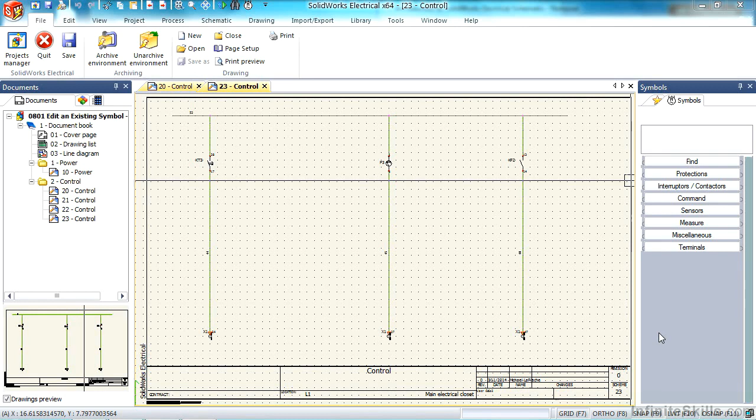It is quite common to go ahead and add circuits that are standardized at your company. Here on this drawing, we have a standard circuit for controls that use standard wiring, standard terminals, and standard gauge wire, as well as a manufacturer item. Let's go ahead and examine this circuit here.

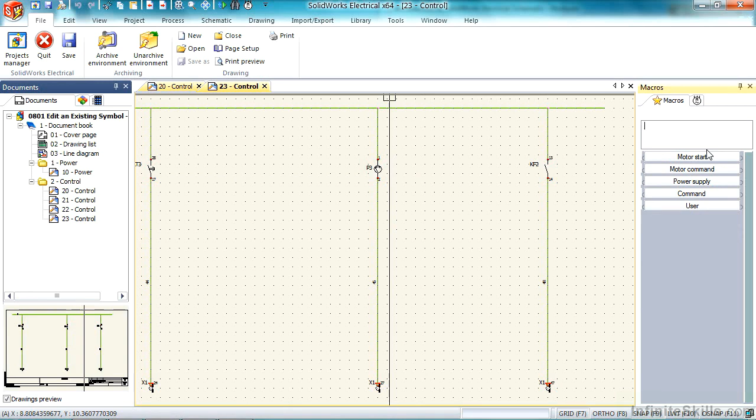Now, I certainly could go ahead and copy and paste this information, but if I want this available for all of my engineers when they start new projects, the macro feature is our best friend here. To actually use the macro library, there's a tab available called the Macros Library. To turn that on, I could go to the View tab and turn the macro palette on and off.

It can be placed wherever you wish on the screen. Mine just happens to be on the right side. You can add information to how the macros are classified.

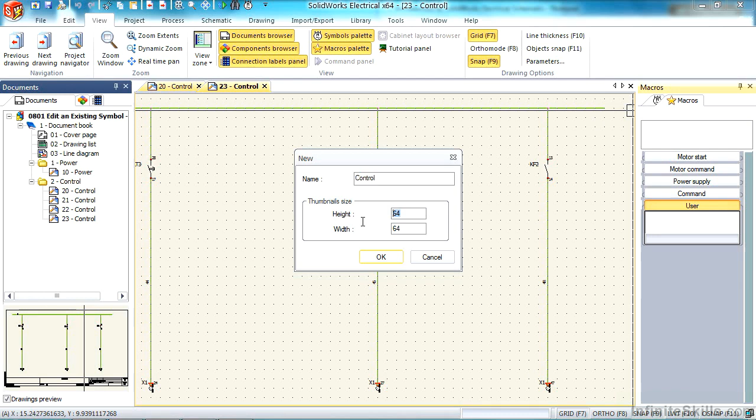To do that, right-click in the gray area and create a new group. Call the group something that makes sense for you. We'll call it Control for a control circuit. And I will go ahead and create a pixel size standard for everything in this group. Because it's a long, slender type circuit, I will make it a height of 256 pixels by 32 pixels.

Now drag the entities into that control window. We'll do a crossing window selection, making sure to grab all of the elements required, including the terminal, circuit, and the wires. Drag and drop it from a wire, but not on the end of the wire.

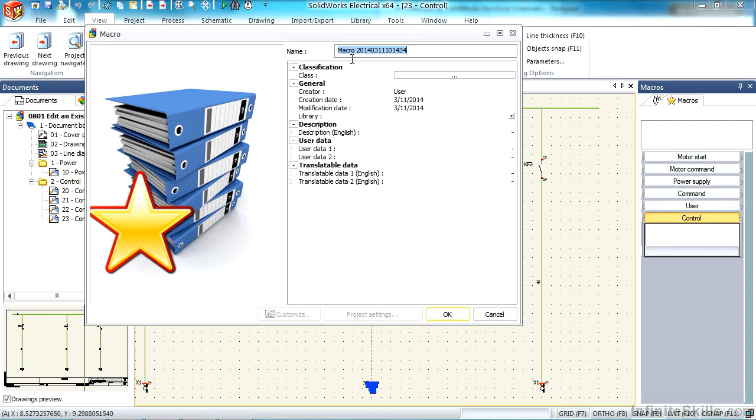Now we're presented with the macro save. We can change the name, as well as any other information, like the classification or the description.

And there it is. Now to use the control circuit that we just created, drag and drop it directly from the macro window onto your schematic. It will bring up the Paste Special option. Here, we can change which marking system to use.

For example, we want to create a new terminal on the terminal block, and we also want to create a new component that references the existing part from the manufacturer's database. So now we have 2 gauges in our bill of materials. And of course, we can keep on dragging and dropping away here, and it remembers your last use setting.

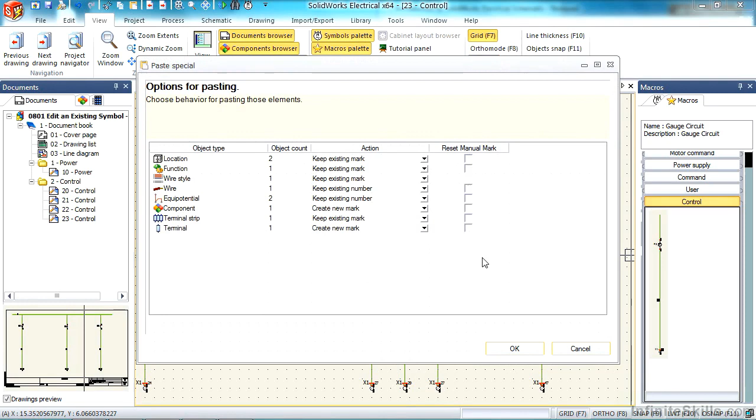One caveat here, though, is that any macro that you create will only live in the project that you have created that macro in. So if I open a brand new project or an existing project, you're not going to have that macro in there.

A good workaround for this is to add these macros to your default templates. So that way, when you create new jobs, they'll always be there.

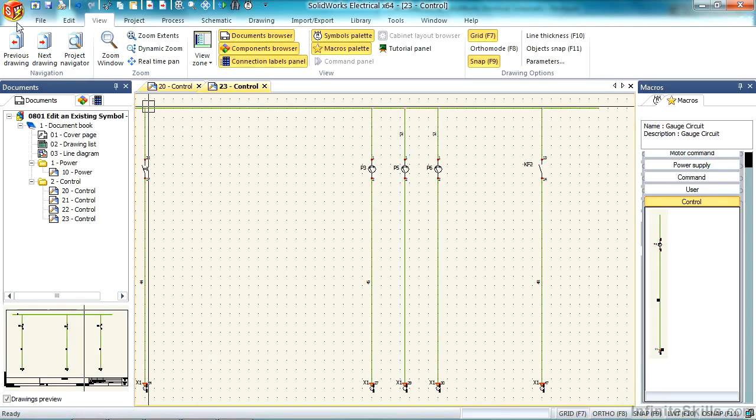So I'll go ahead and create a new ANSI project, which is my standard. And then in the new project, we'll name it whatever we want here, because we're just going to overwrite it with the ANSI template name.

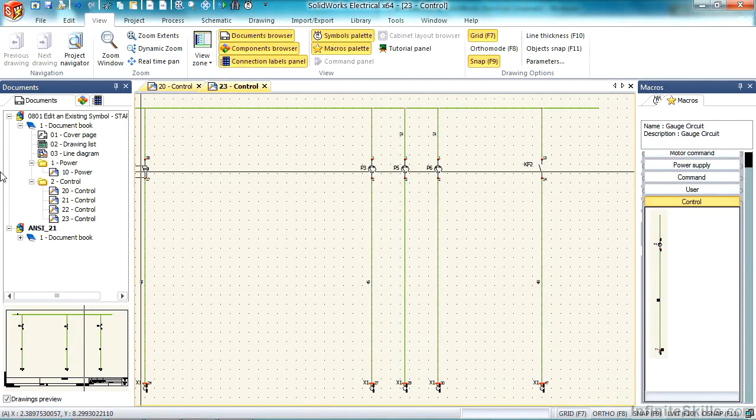And once it's open, copy and paste that circuit into the blank project and make a macro out of it in the blank project, making sure to leave my existing project open so that I have 2 project windows. Because I have 2 project windows open, I can use the macros.

Now close the existing project and keep the blank project open. Notice the macro library goes away because we don't have any stored macros.

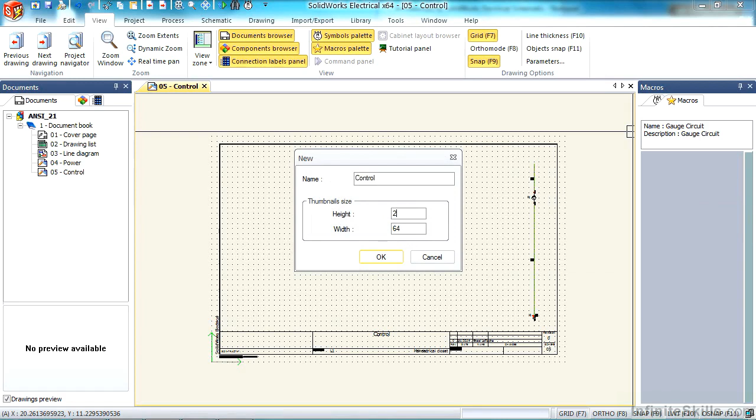We'll go ahead and create a new group once again, giving it the appropriate pixel sizing, and now we'll drag and drop it as normal, giving it the proper name.

And there we go. Now we'll delete it from our sheet because we don't want those circuits available on the sheet, we want them in the palette. We'll close the project out, and now we'll save it as a template once it's closed, and we will overwrite the default ANSI template.

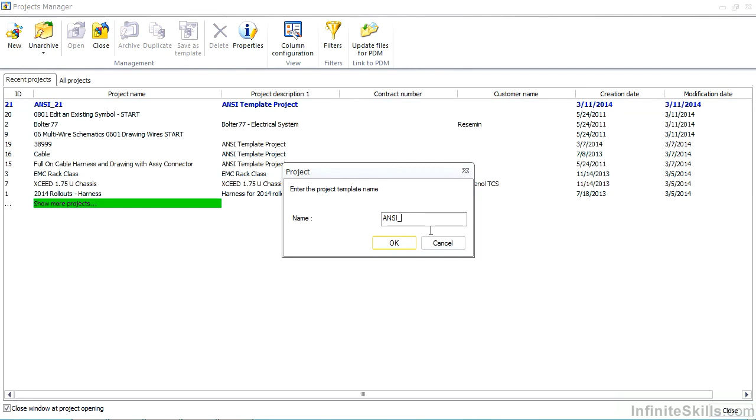So now, the next time we open a new ANSI project, that macro library item will be available. So anybody in the company that creates a new project from the ANSI template will have that standard control circuit available for use. And this really helps cut down on purchasing costs because we're all buying from the same supplier with the same part number and our inventory is under control. And there it is.